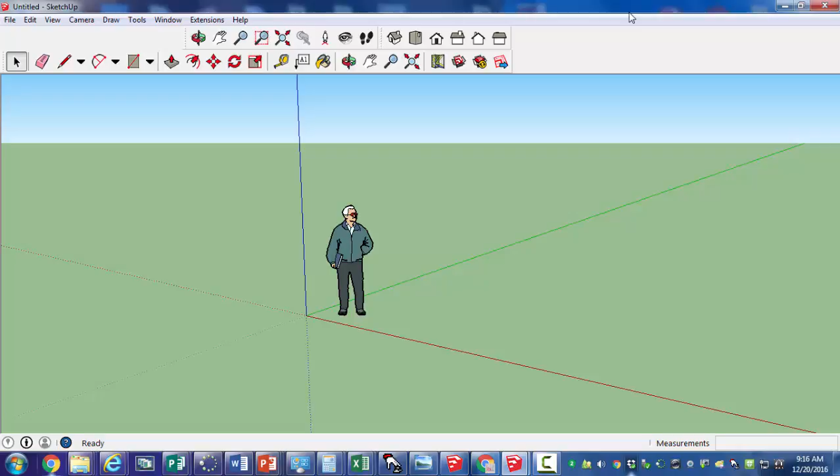I'm going to launch SketchUp right from my desktop so that I start out in a blank world. You don't need to go to File, New if you're just launching the app itself.

And you start out with a person. We're going to leave him there for now so that when you build, you have a sense of scale. How big is what you're creating versus a human being?

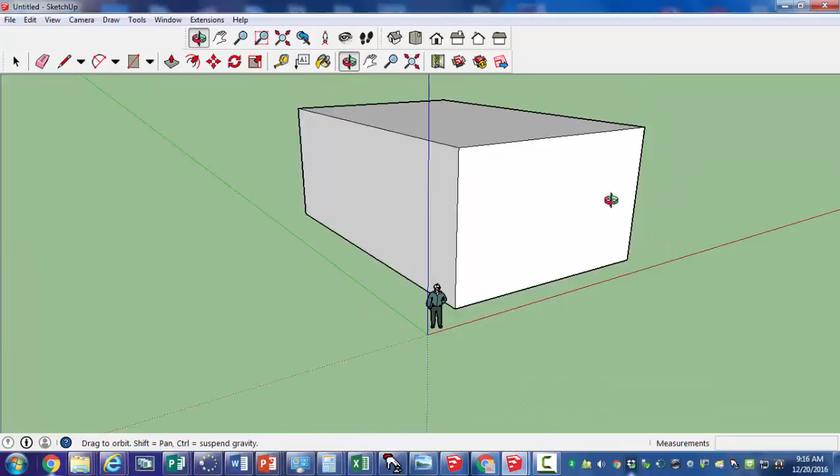As you go, you can start with a shape on the ground. That's one way to start. And this is obviously a very rectangular building at the moment, but as you are aware, you can build things off of your building.

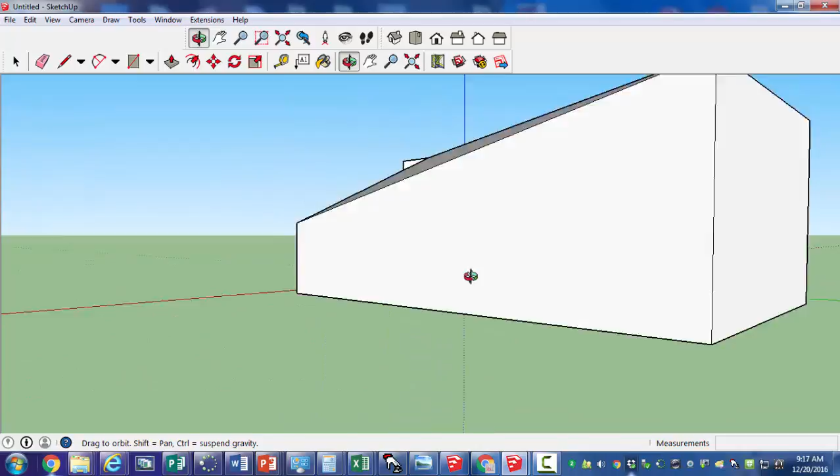You can use the move tool to move individual lines. You can move individual points. That sometimes gets a little bit interesting. You can, of course, do doors and windows.

And think about, again, how big is a person versus your doors or your windows. And if you select on that and hit delete, it goes away. And then you have the ability to enter.

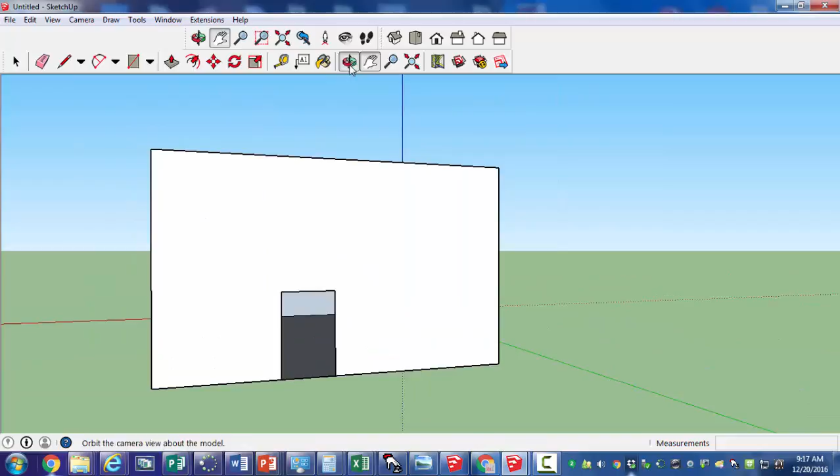Now, we're not focused on modeling the inside. If we do the outside only, that's the main focus, although some of you will be able to do the inside as well. But the outside is the main focus for our store. And think about what kind of business you have and how does that affect how it looks.

As you go, we're going to spend the time to really make this have some interesting details. Sometimes that just involves kind of randomly throwing on some lines or some curves and doing some push-pulls, and just kind of seeing what kind of interesting things happen as you slightly move things around and push-pull.

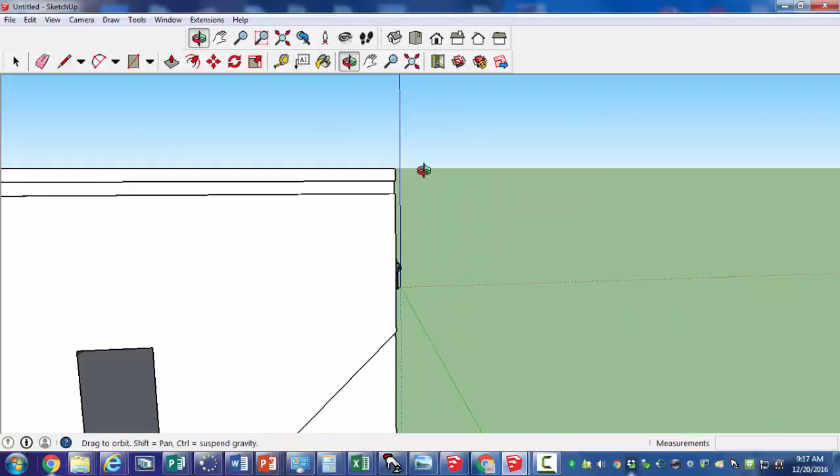The idea is that you're giving your store details. And if you looked at a real building, there's all kinds of extra details going on that make them interesting.

Here, if you're going to do a window, think about what kind of details can your window have, or what kind of windows do you even want in your store? Would they be up high? Would they be down low? Would it be something large?

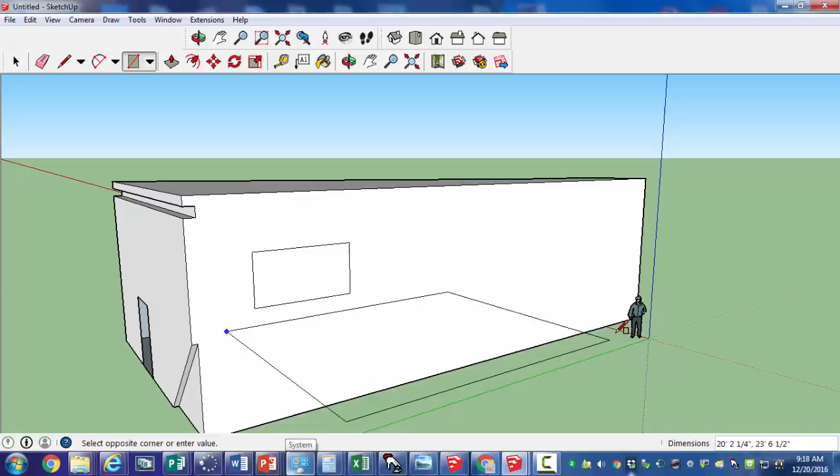But in terms of the details, think about, could your window have a frame? That's one simple detail that might make it a little bit more realistic versus just a rectangle.

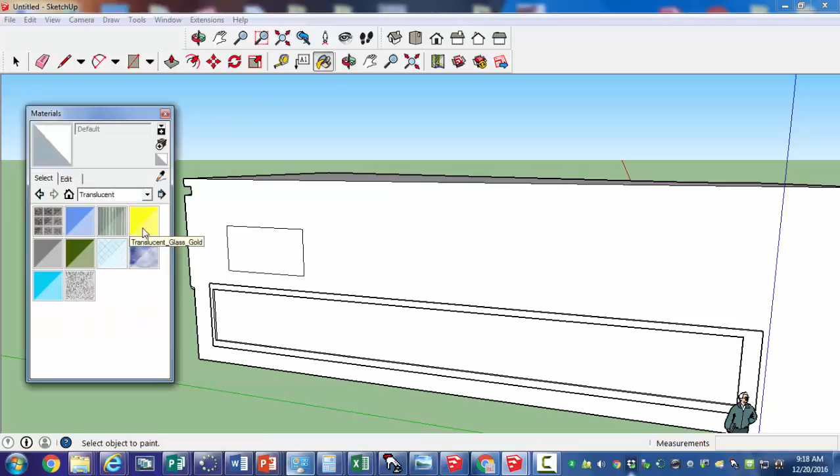And as you recall, in the paintbrush tool, there is a category called translucent that can turn your windows into tinted glass, essentially. And you could have some windows around your store.

So start getting some overall structure. Again, remember the line tool can draw on things. And if you have a closed shape, you can push-pull that out.

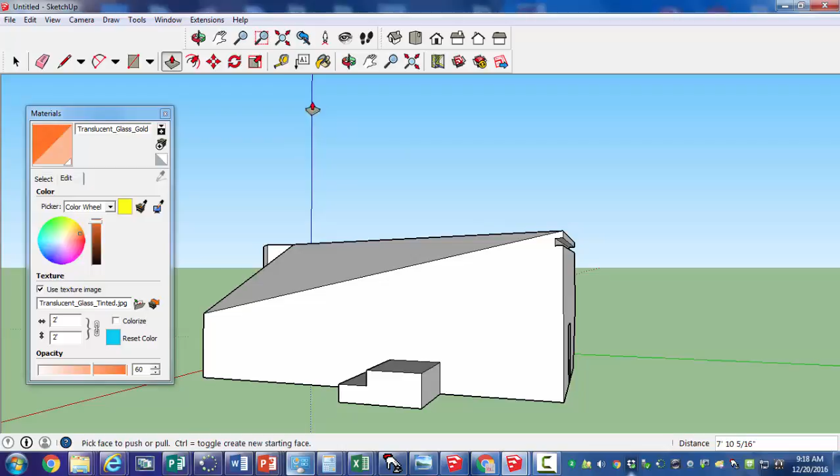You can also use the arc tool, any of the tools that we've talked about. Think about the roof.

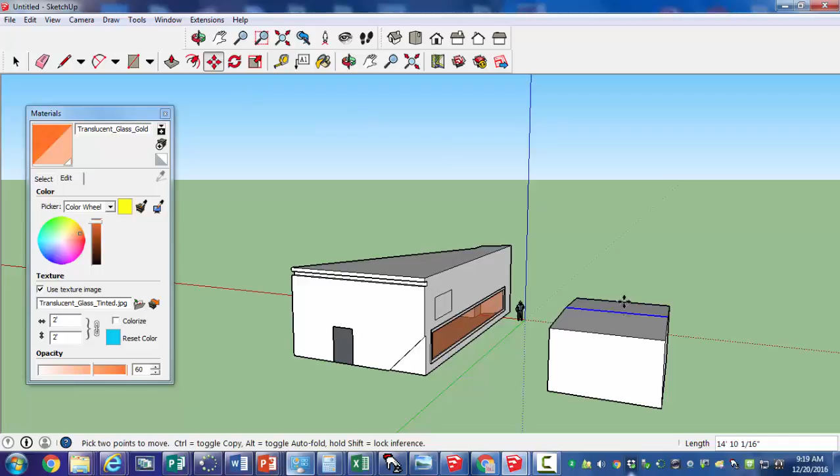The roof might not look like the roof of that house from the first tutorial. That's okay. The roof of a retail store or a hotel or a restaurant generally doesn't look like a house anyway. So for those of you that remember the first tutorial where you took a line and brought it across and brought it up, your retail business might not have that particular effect.

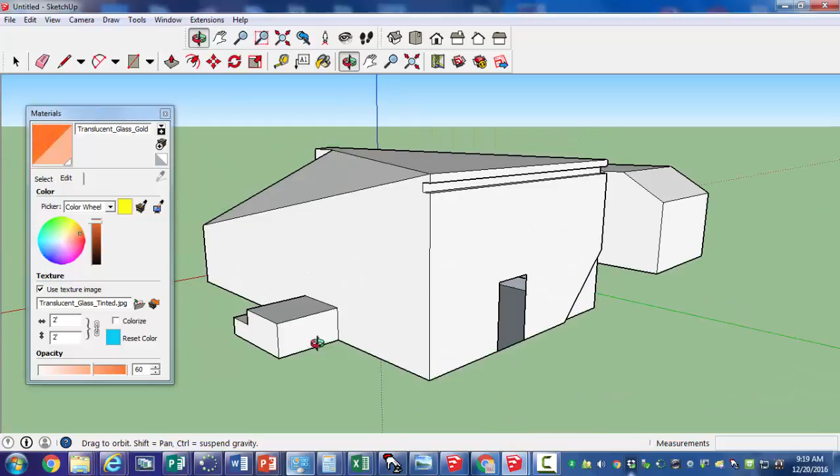Who knows? Be creative. Be unique. Make something that is just kind of interesting to you. And if you don't like what you're doing, then hit undo and get it back to the point where you did like it.

All right, so start out by building some structure. When you feel like you're ready to add some signs to your building, go check out the next video.